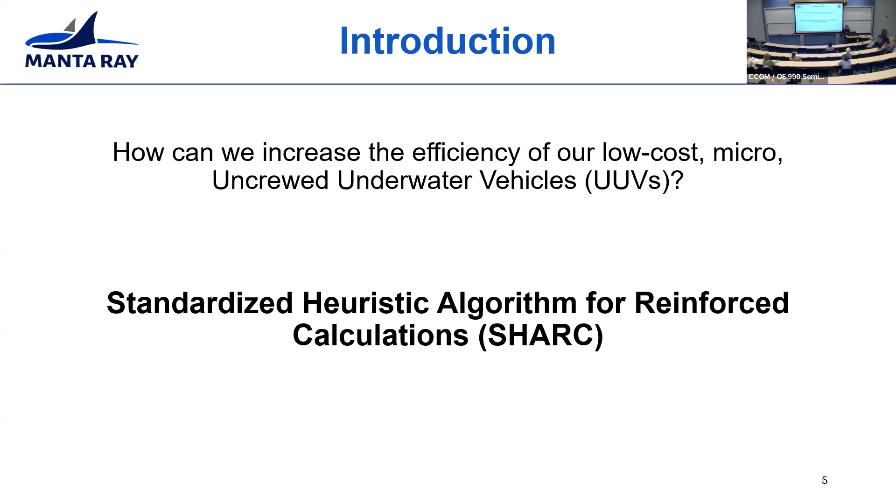But the trade-off for these lower cost vehicles is how well they actually work compared to their higher cost counterparts. We're not going to see the same performance in our lower cost vehicles that you do in the higher cost ones. But how do we accommodate for these trade-offs? Well, we make an algorithm to take what we're working with, predict how it's going to perform, and then work around this information to optimize missions. And this is where we came up with the Standardized Heuristic Algorithm for Reinforced Calculations, or SHARC.

So SHARC is a three-phase algorithm where first you consider what sensors you have on board, what you're working with, then predict what the performance of these sensors looks like, weighted on the ambient information that's around the sensor package itself. And then you're going to leverage this information to optimize your vehicle perception performance.

In the case of this presentation, we're focusing on a mechanically scanning imaging sonar, and that's going to be our perception sensor. And for our ambient sensor, we're going to use a conductivity, temperature, depth, or CTD sensor. Then we're going to predict and model the performance of this perception package to improve our vehicle mission performance.

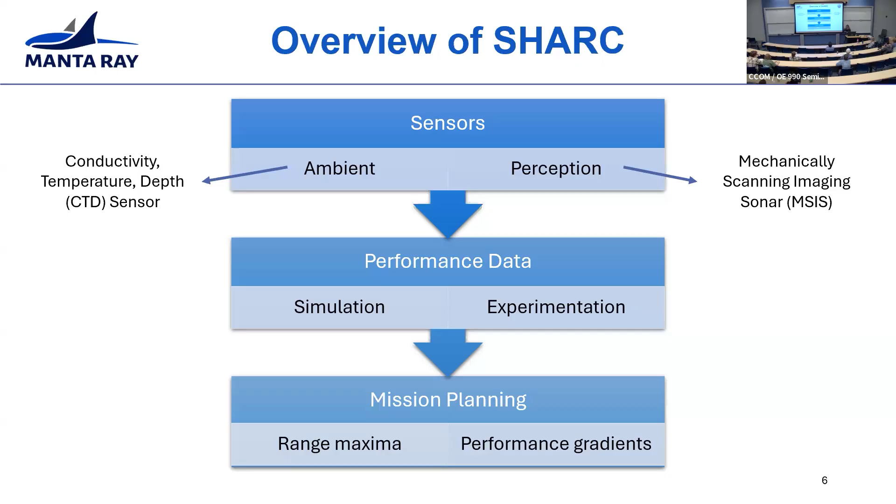And to use this equation, we need to identify 4 variables here: our source level, our transmission losses, our target strength, and our detected noise levels. Here we're going to start with our source level, which for this study, like I said before, we're looking at a mechanically scanning imaging sonar. The sonar we used was the Blue Robotics Ping 360, and the reason we chose it was because it's easily available on the market and it has a lot of similar counterparts that we could also test this algorithm with.

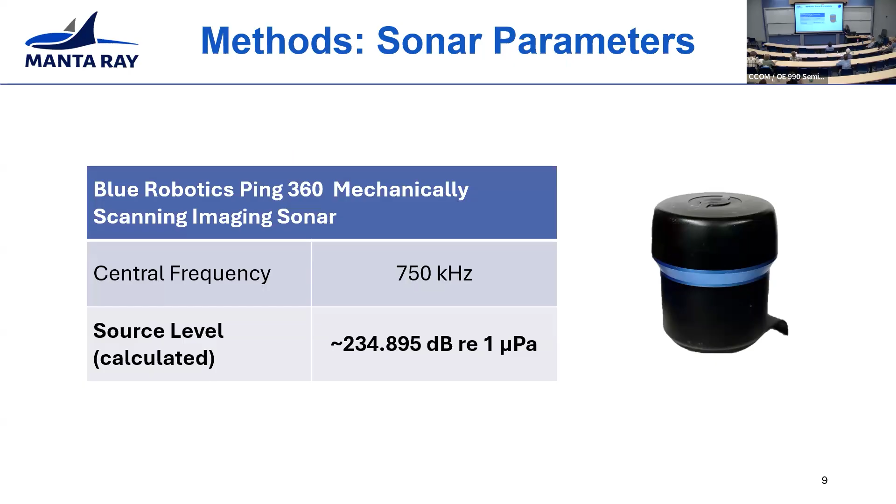The sonar itself has a central frequency of 750 kilohertz. We assume the far field approximation and that the transducer is a line array. So we found that our source level would be about 235 decibels, referenced to a pressure of 1 micropascal. The next thing we're going to look at is our target strength. So we're going to go a little bit out of order.

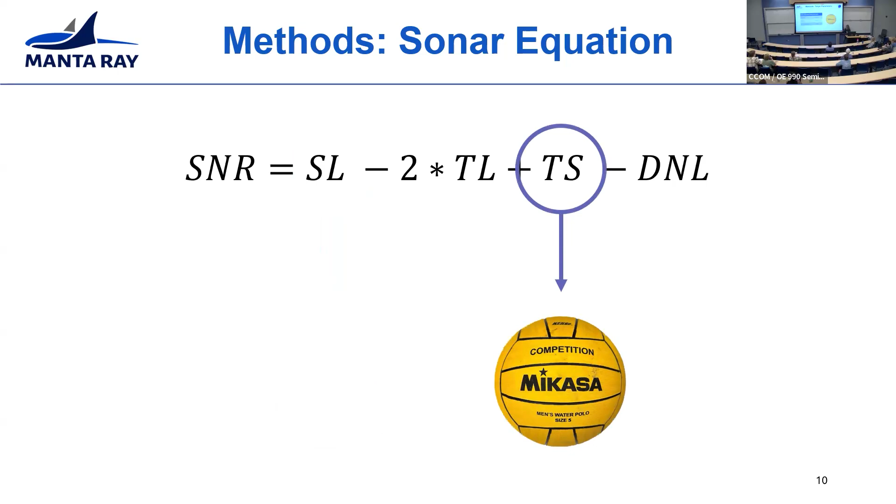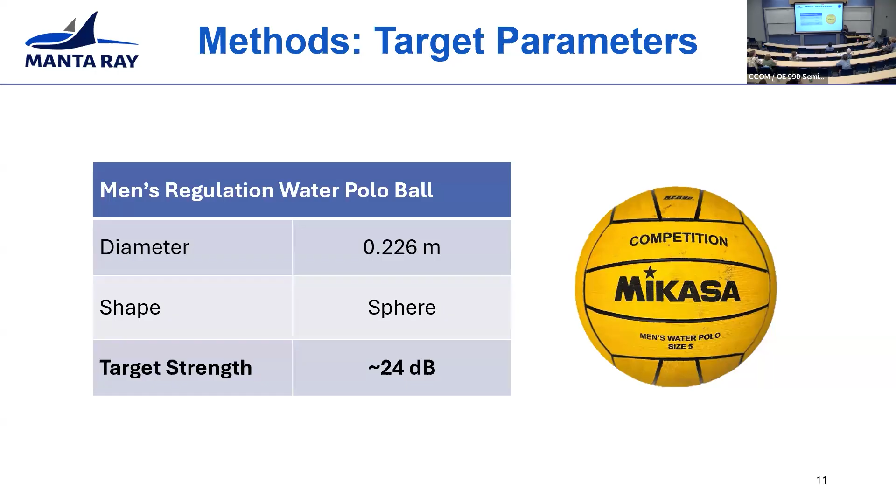And while you're in the marine environment, you consider a target such as vegetation, sunken structure, fish. In the case of this research, we're going to look at a men's regulation water polo ball. And yeah, a polo ball you don't really find in the wild too often, but I chose this target because it's easily accessible and it also makes things a lot simpler to model since it's an air-filled sphere. So using Urick's target strength calculation for a perfect sphere, we find that the target strength is about 24 decibels.

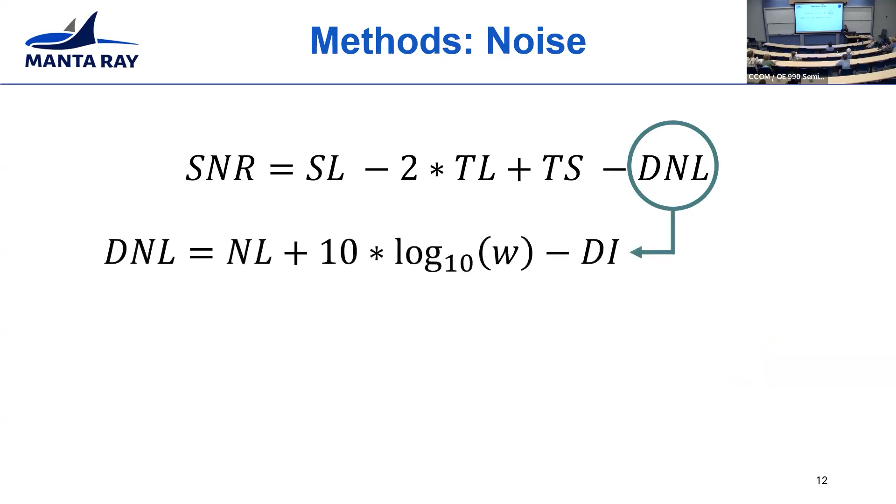So now we have our source level, we have our target strength. Let's look at the noise around both of those things, and we're going to use this equation to find our detected noise level. The first variable I'm going to focus on here is our noise level itself. Since we're using such a high frequency source, we're going to assume that it's self-thermal noise limited, and using Harland et al.'s equation here for noise level, and using frequency in kilohertz, we can determine that variable. And the other 2 variables here are also dependent on the source, where you're looking at your bandwidth and directivity. And that gets us our detected noise level.

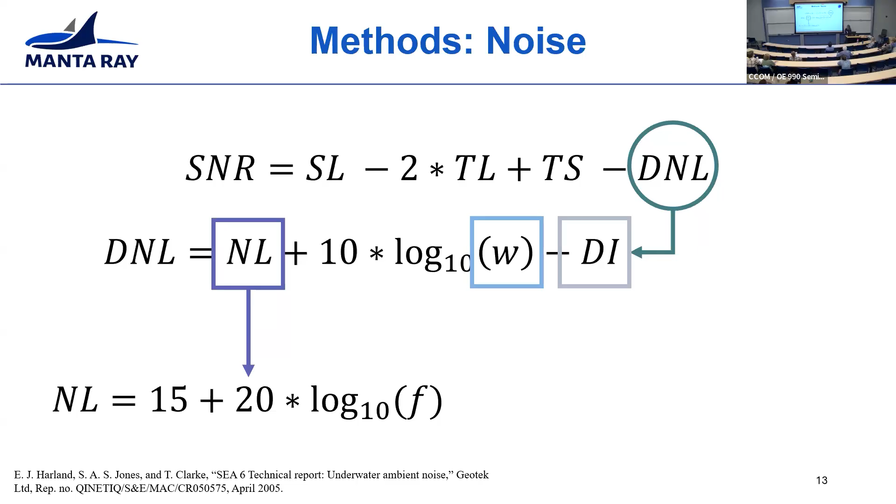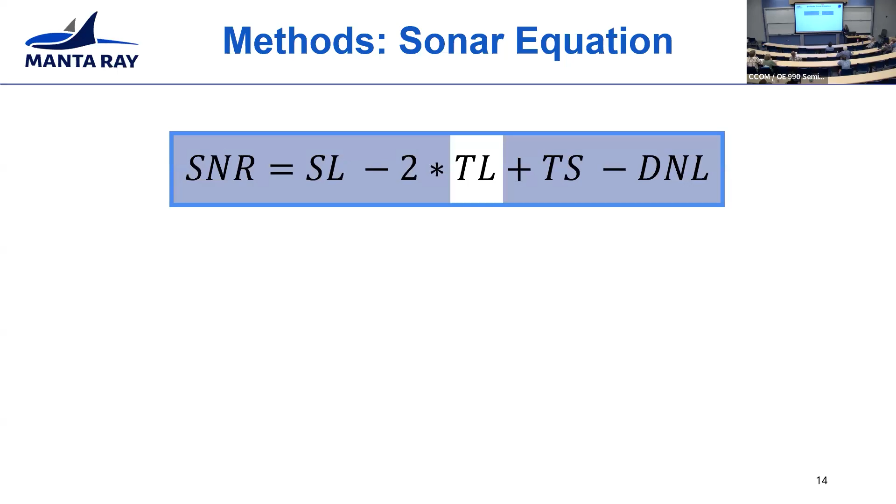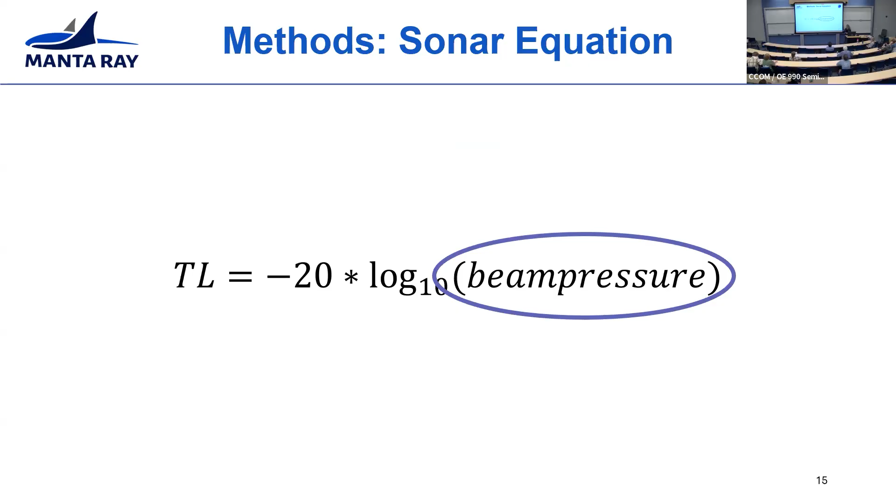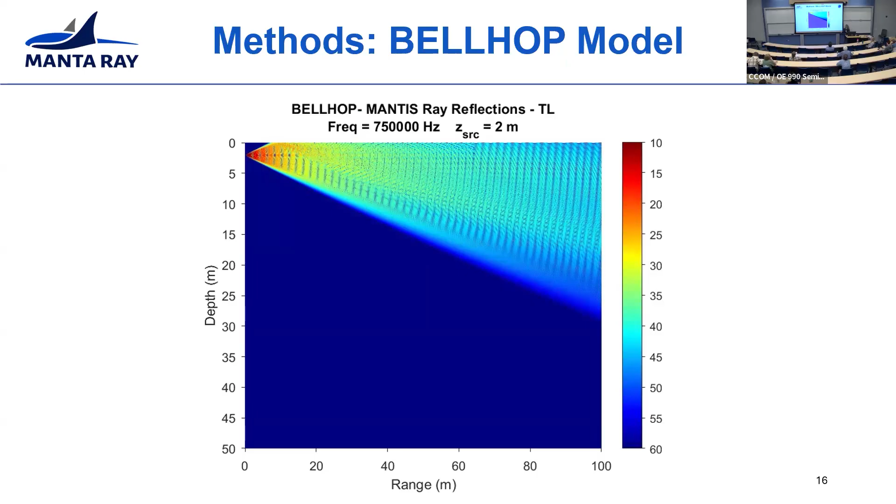To initialize all of this, we have an environmental file we can fill out where we can specify our sonar characteristics such as central frequency and beam height, our water column characteristics such as sound velocity profile, bottom acoustic characteristics, and channel range or length and depth. And we can also specify where we want to place our source or sources, and number of calculation points as denoted by RD or NRD across length and depth.

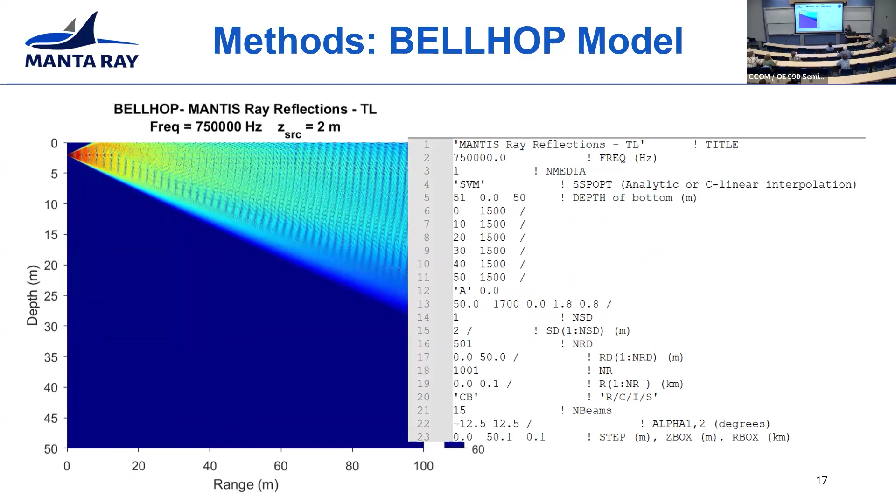Because we can also specify our sound velocity profile, or SVP, this is where our CTD data comes in. And we pulled from several historic CTD data sets from all across the North American region. One right from the Gulf of Maine, another from the Hood Canal out in Washington, and a third extrapolated from the Beaufort Sea. We also have a control group of 1,500 meters per second throughout the depth of the profile.

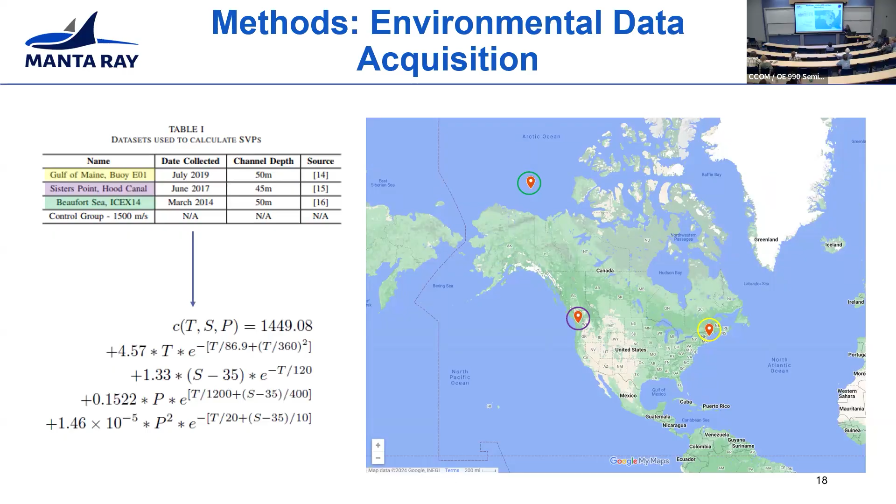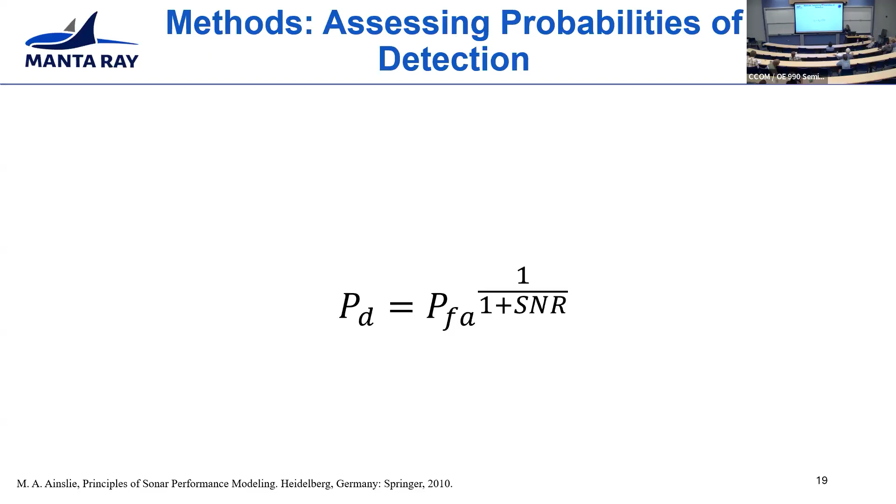And then we plug this data into an approximation of the Del Grosso sound speed equation to solve for that sound speed value. So going back to our sonar equation, why do we need this again? Well, it's to get this value here, which is our probability of detection. The last variable to identify is our false alarm rate, which we're going to assume to be 10 to the negative fourth based on Ainslie's sonar performance modeling text, and we can solve for that probability of detection.

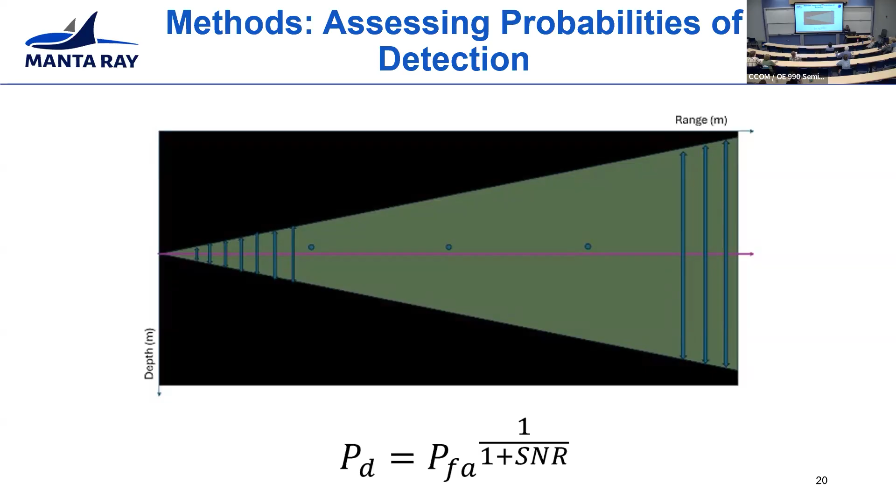But since we're going to have such a wide range of values based on how many solving points we put in our simulation, we came up with an averaging scheme where for every source depth specified within our simulation, PD across our beams are averaged by evenly distributed steps away from our source, filtering out values outside the beam. And then averaging was done across groups of beams for each source sample. We were then able to use these averages to gauge the general range performance for different PDs away from the source. This takes us right into our results here.

And we could not figure out a solution to actually filter that out, or to completely eliminate those boundaries. So for the shallower water column runs, such as less than 10 meters, we weren't able to really reduce these effects. So we focused on these deeper 45 to 50 meter channels, and focused away from those boundaries to make sure those weren't interfering with our results.

Now with that information, we took that snapshot of the column 5 meters from each boundary and focused on the range band where we see a probability of detection of 80%, or PD equals 0.8. These results were extrapolated using the averaging technique I specified in the previous slide, and each range represents range away from the source, and each depth is the depth a source was placed throughout the simulation. PD 0.8 was chosen because it was desired for sensor performance, as well as the last performance band prior to seeing those effects I described previously.

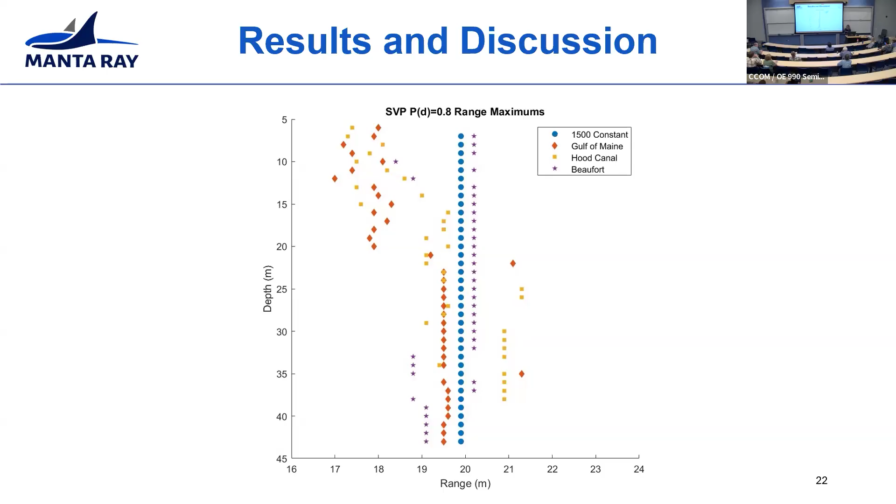And what we notice here is that for every sound speed profile, we're starting to see variances forming within the different depths. And to further break this down, we plotted each 0.8 average depth band along with the line fits of the different parts of the SVPs, which I'll go over in the next few slides, starting with the Beaufort Sea. The SVP here was a little more linear. There was only about 1 meter per second change throughout the 40 meters shown here.

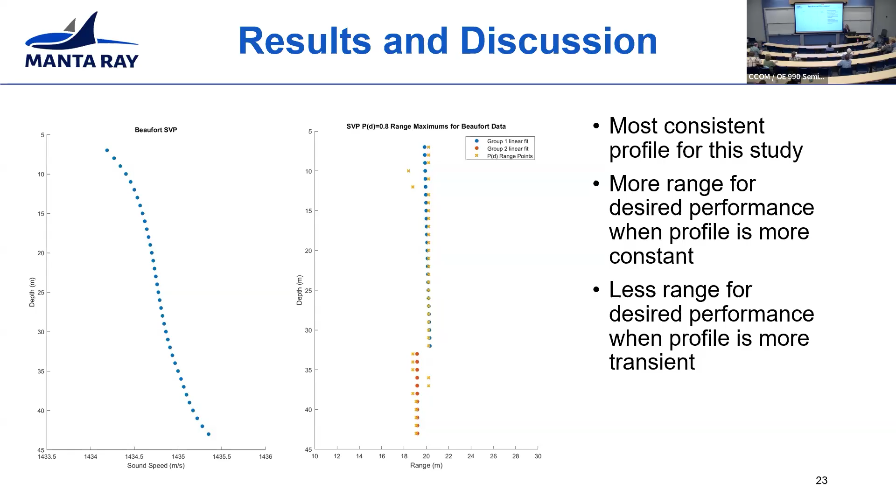And the change of the linear fit was for the different directionalities, but we start to see that as less change occurs in the SVP, the further out we can achieve that performance that we want to see. So you have more room to actually see that performance. Whereas when there's more change, you get less space, which we can see in our more variant SVPs, such as the Gulf of Maine, where you have more change at the top of the SVP due to change in temperature from this profile. And you can see that at the top there, where there's more change, you have less range to get that desired probability of detection.

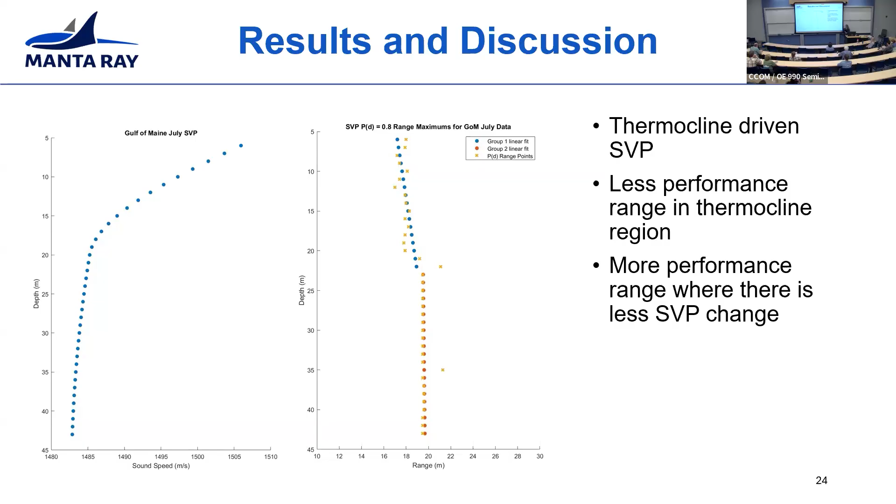But as you travel deeper into the water and the SVP becomes straighter, you get more of a pushed out range to actually get that desired probability of detection. And finally, we see that with our last SVP from the Hood Canal, where this one was changing due to a change in temperature and salinity, and we're still seeing those effects where towards the top of the profile where there's more change, you get less room to get your desired probability of detection. As you get deeper down, you get more range of your desired probability of detection.

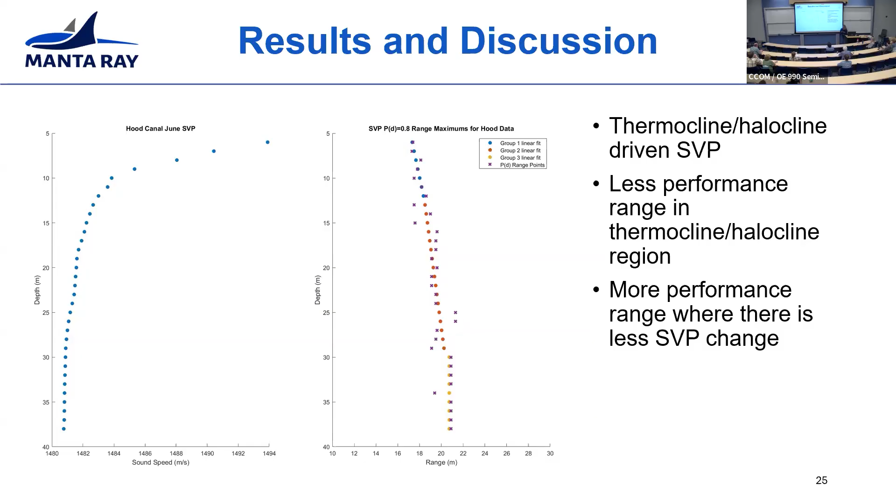And plotting these observations for the line fit slope of the SVP curve against the average maximum range, we can see there's a positive correlation between the two. So as you get more slope in the SVP, we get more range of our desired performance. Less slope, less range of that performance.

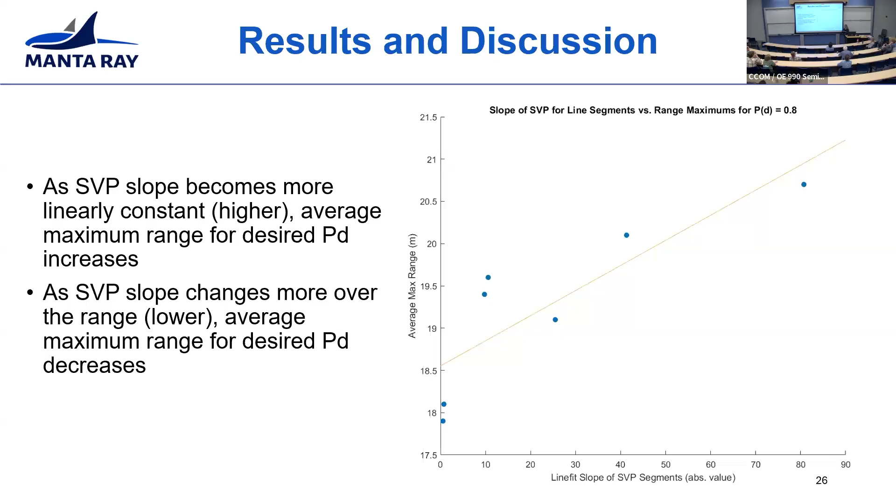So how can we use this with SHARC for mission planning? Now that we know about that correlation on the previous slide, if we have a pre-captured SVP prior to our UUV deployment, we can plan around our deployment depths and patterns based on how far out that desired range is. So say you're using a pattern where the UUV is traveling back and forth like someone mowing a lawn, you can increase or reduce those passes depending on how much you can predict your range will be for your desired probability of detection.

For our experimental testing, which you guys will get a sneak peek, we plan to implement this in different ocean environments, which is why we chose a target like the water polo ball and an easily accessible sonar like the Ping 360. And some of this testing already began in Washington State this past summer using the Ping 360 and the water polo ball, and all of that work is currently ongoing.

Finally, we'd like to apply SHARC to different sensor types such as stereo cameras. And while the study focuses on the acoustics portion, we believe SHARC could be applied to the different perception sensor systems on board these low-cost UUVs. These are my acknowledgements for the paper itself, as well as my references.

So then this is going to bring me right into my current research, which I alluded to. But before we get into that, I just wanted to introduce the manta ray group for those who don't know a lot about it. Dr. May-Win Thein is in charge of it, along with our co-PI, Dr. Yuri Rzhanov, who actually sits up in CCOM. And the manta ray group partners with the Advanced Controls Lab, one of Professor Thein's other labs on campus, focusing on quadcopters. And the main mission is to connect all of these different systems between undersea, surface, ground, and air to create a collaborative environment of all of these uncrewed vehicles.

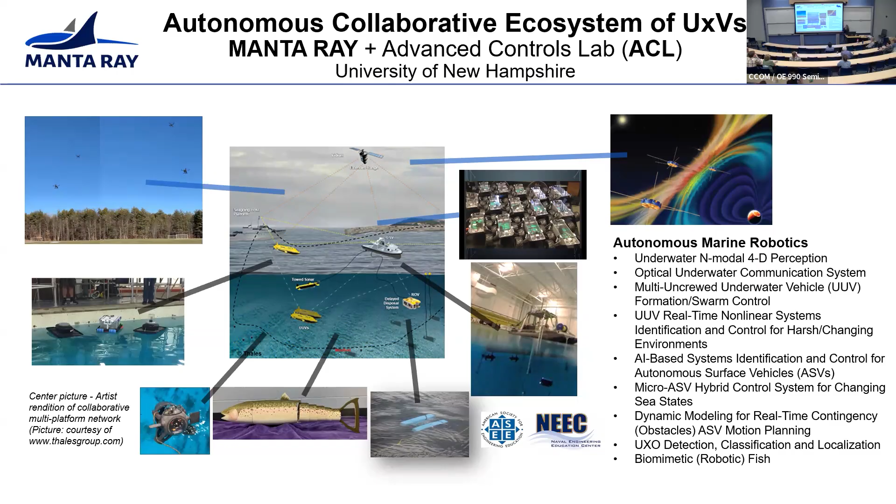And I think Professor Thein's in the room, but her pipe dream is for friendly Skynet, which I always laugh at. But that's the overall goal of the collaborative ecosystem that she's in charge of.

And then I just wanted to give you guys an idea of what our day-to-day looks like. As Adriana mentioned, I assist with the platform designs with the undergraduates, as well as I'm a mentor for them. So we go on trips out to Keyport, which was actually from the summer. We work on vehicles together. Our undergraduates always present at the URC at the end of the year. And our grad students, we try to go to the GRC or the SOE graduate symposium, and so on.

So the objective of my research is defining this bio-inspired set of techniques for autonomous perception using a multidimensional approach, and using these multiple sensors and multiple perspectives. And what I mean by multiple perspectives is we have multiple underwater vehicles capturing different viewpoints, or you have one underwater vehicle capturing a bunch of viewpoints and we piece it all together.

We're developing this for missions such as detecting underwater unexploded ordnances, or UXO, or even observing confined aquaculture pens. For those who saw Dave's presentation last week, we've done some collaboration with Aquaport, and Maggie's research kind of centers around that. And we're trying to make these techniques generalized to ensure modularity. So going back to that low-cost UUV question, how can we make this as low-cost and modular as possible to put on all of these different platform types?

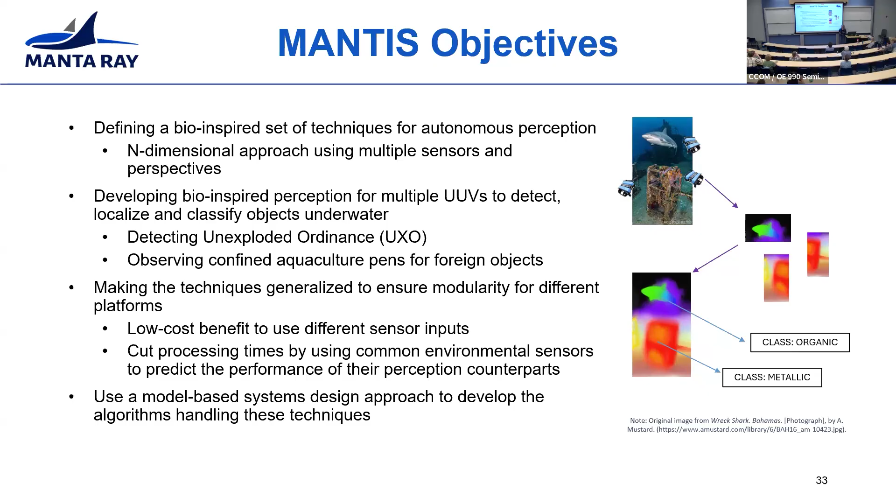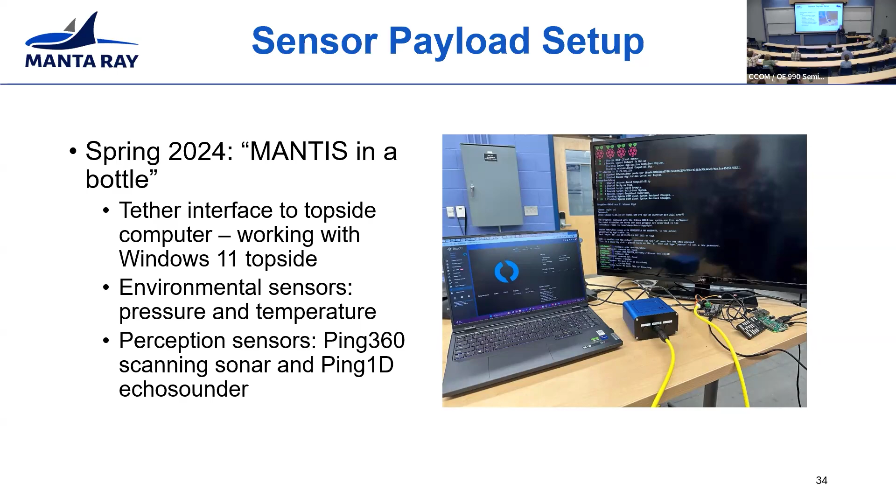Going back to the spring before I went out to Keyport, I got kind of a mantis in a bottle, or in this case, mantis out of a bottle, where I hooked up a Raspberry Pi to the Ping 360 sonar, along with a temperature and depth sensor. And I got things working with BlueOS, which has a Linux kernel that I was able to install onto the Raspberry Pi and access through the tether to my top side, which was a Windows 11 laptop. And you're able to SSH into the Pi, do diagnostics as your sensors are running.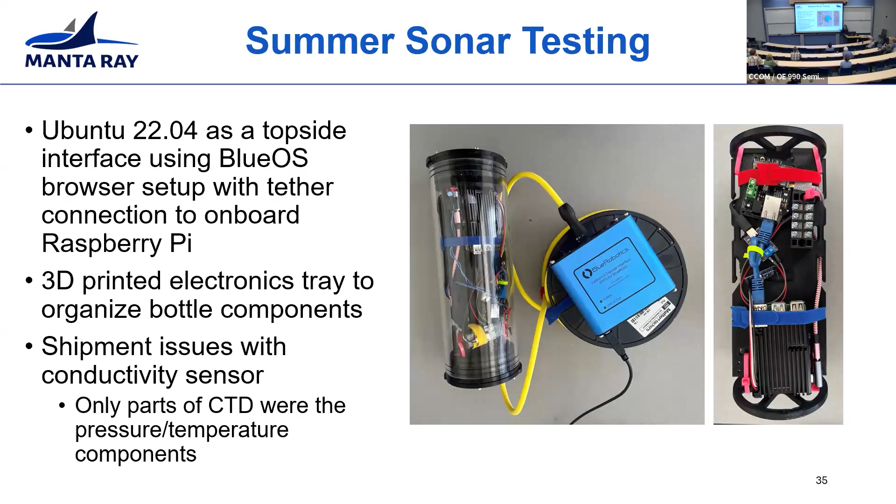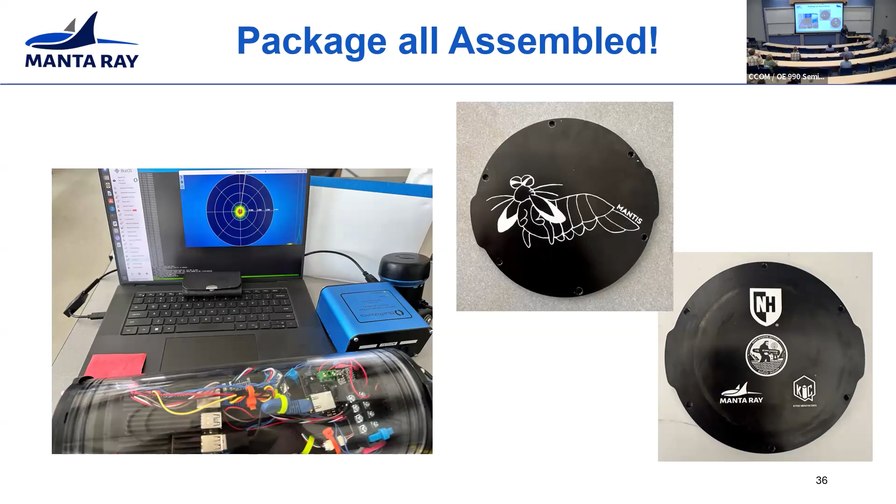And then this is just a snapshot of the actual package working on the Ubuntu machine, as well as Keyport helped me create my own logo for my research and laser etch it on the bottle end cap. So that was pretty fun.

Along with sonar testing, especially in an area that has a lot of marine animals and you have a military facility, so a lot of the waterways are controlled, there's a lot of environmental considerations. So I got to meet a lot of pinnipeds this summer, looking at different test sites, as well as filling out different environmental review board paperwork to make sure that my non-de minimis source was not going to hurt our pinniped friends.

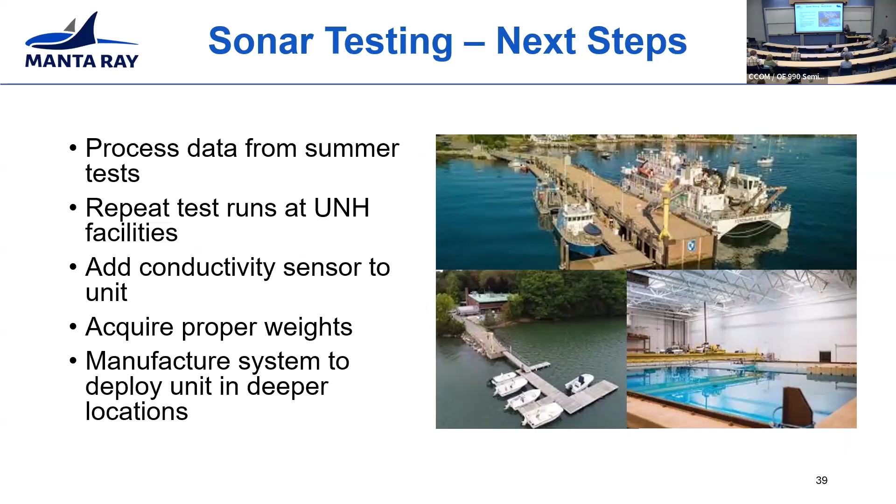Aside from the sonar, I also mentioned that following studies would be with stereo cameras, which we've also started looking into. We've acquired 2 ZED stereo cameras, and we're going to test those in the labs for different ambient light levels and see how the performance of those cameras change. And same thing, we're going to test that in the water, hopefully at the UNH facilities over the next year, and maybe even out in Washington again this summer.

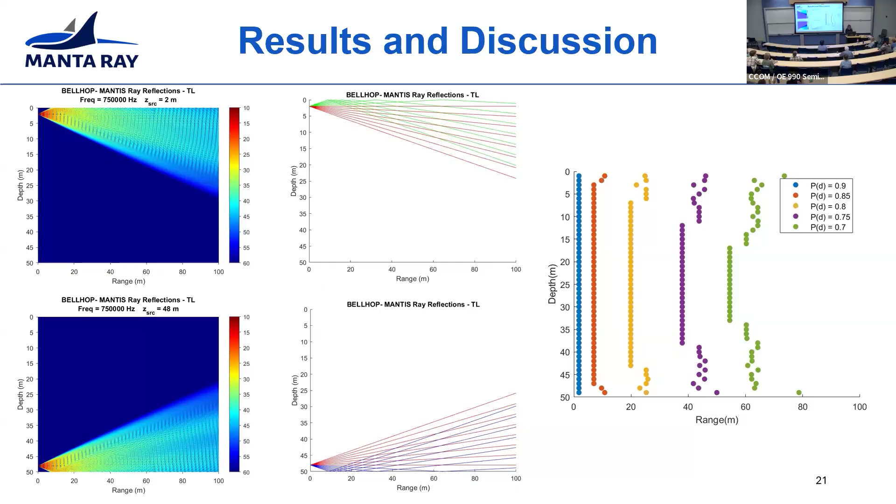Hi, I do work on robotic fish, and so my talk today is going to be about my paper for Halifax, but then I am going to go a little bit into the history of the robotic fish here at UNH, and some of my work on what I hope to do in the future through my research using the robotic fish. So my paper today is titled Mathematical Model of Subcarangiform Robotic Fish. I do this work in collaboration with Dr. May-Win Thein through the Marine and Naval Technological Advancements for Robotic Autonomy Group.

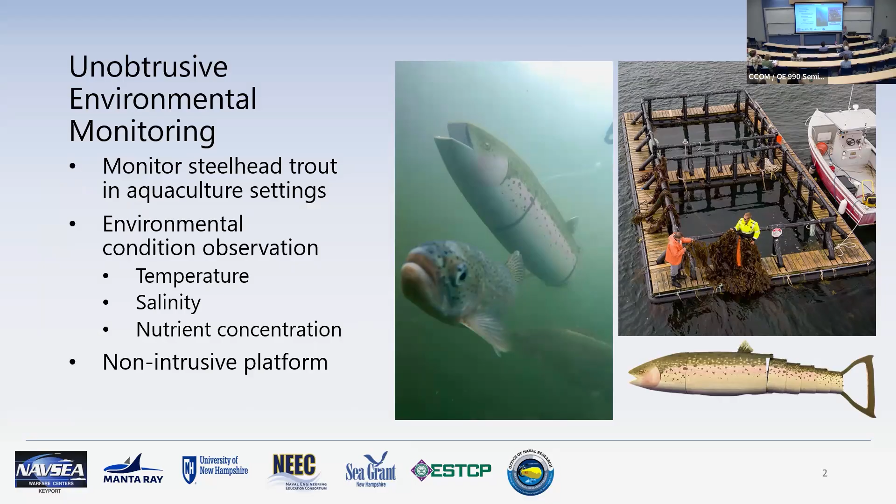The vehicle I specifically work on is the GHOST Uncrewed Performance Platform Submersible, or GUPS. GUPS is designed to be deployed in unobtrusive environmental monitoring conditions. At UNH here, we deploy it in the aquafort, or the aquaculture setting off of New Castle, New Hampshire, to observe wildlife and environmental conditions without disturbing the natural wild marine life.

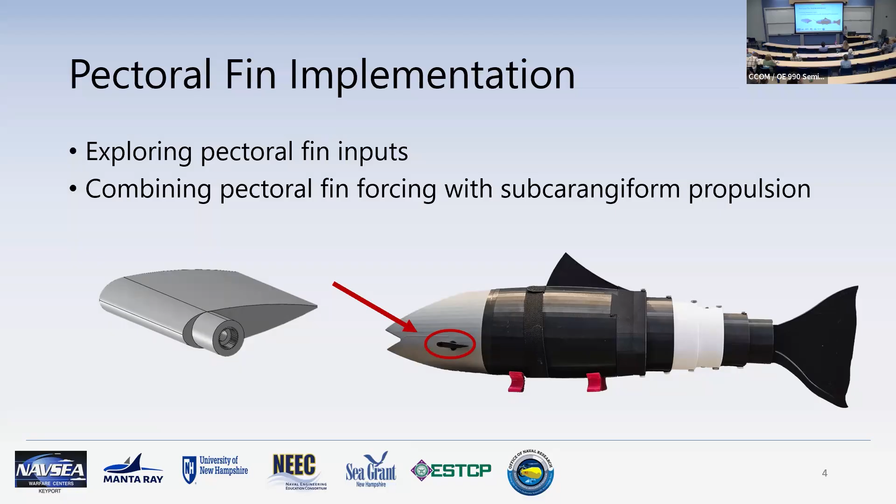At the beginning of this work, GUPS was able to swim in a lateral 2D plane using subcarangiform motion with a servo mounted at the back of the body and a driving location at the third tail linkage. This work splits the robotic fish into 4 linkages as shown here to help simplify the calculations. In addition to the subcarangiform propulsion, pectoral fins were implemented on the robotic fish. These pectoral fins were added to have an airfoil cross-section in order to have known drag and lift coefficients for simplification.

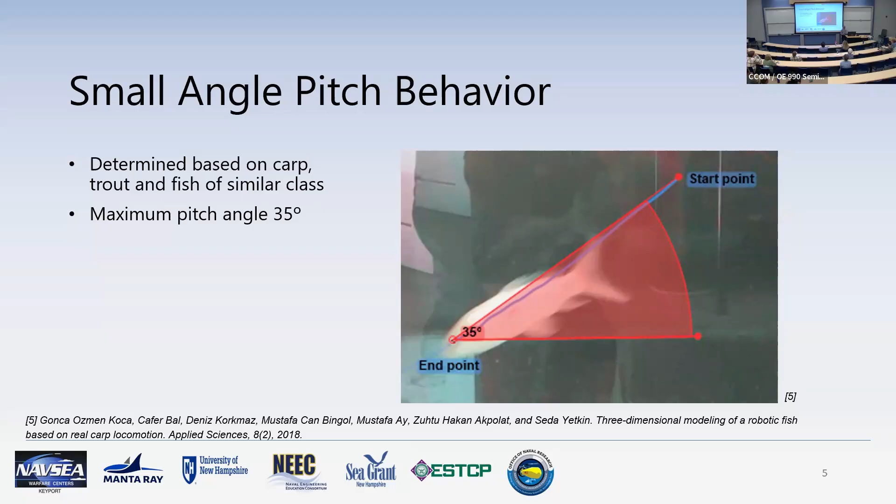Unlike reef fish, who swim in all different directions in coastal environments, trout, carp, and other fish of similar class that our specific robotic fish is based on maintain small pitch angle behavior. Koca et al. helped quantify this as a maximum pitch angle of 35 degrees. So that is what we will be using in this work as the criterion to try and stay below in our case studies.

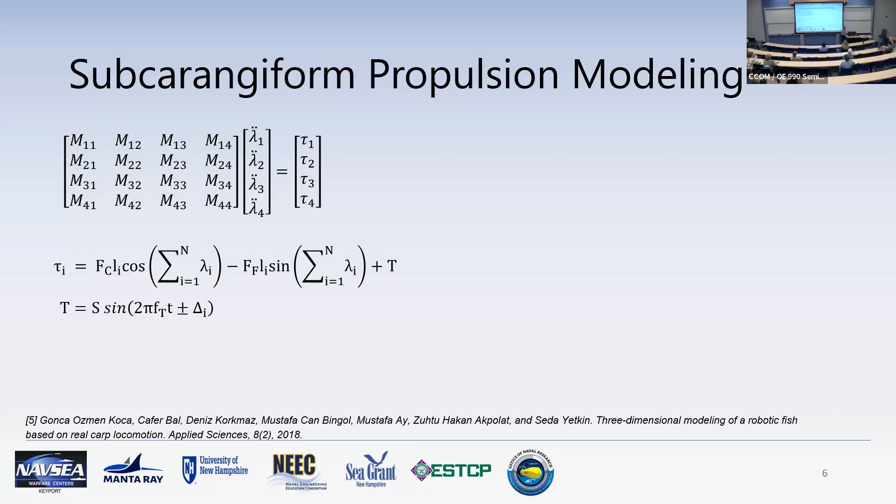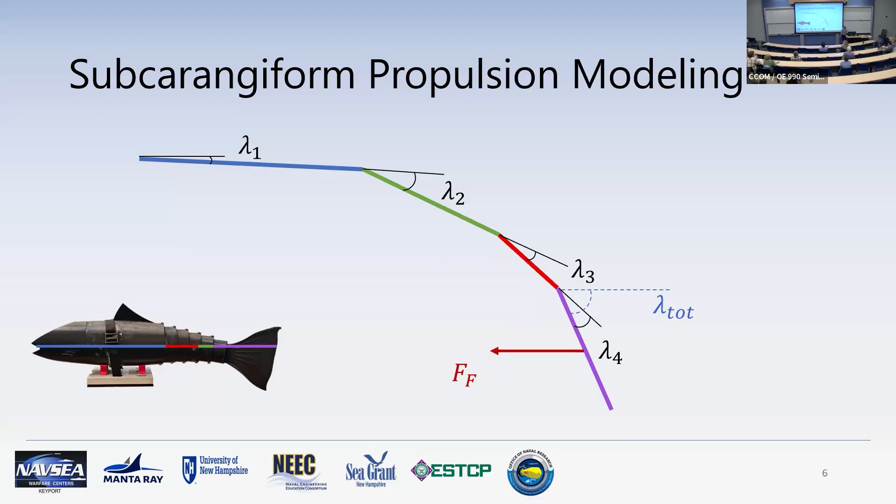So getting into the mathematical modeling of the subcarangiform propulsion, Koca et al. has this equation where we look at all of the different couplings between each tail linkage and the external forcing. External forcing is calculated as such, where T is our input from the servo motor, and it is kept constant through all of our different cases. Forces are calculated here, which gives us ultimately an angle between each tail linkage and an overall angle of the caudal fin, or the rear fin of the fish, in relation to the center line, as well as the overall thrust force that is produced.

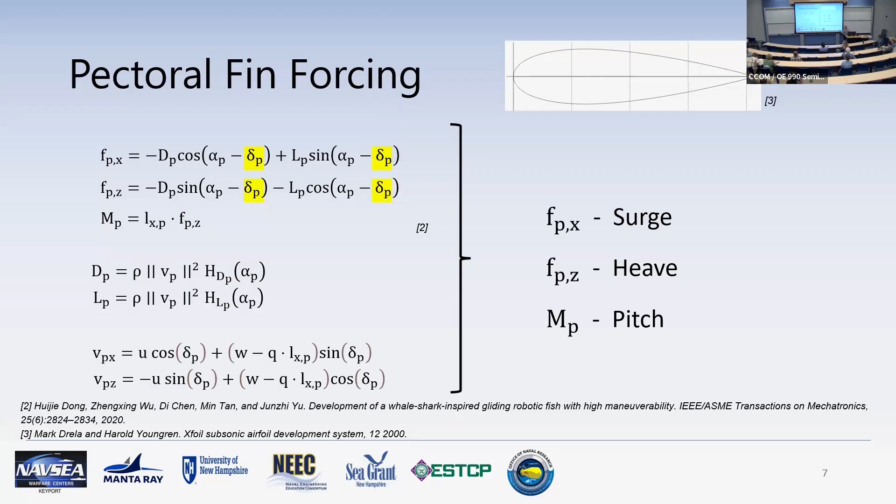Going into pectoral fins, Dong et al. gives us these equations in 3 degrees of freedom, where delta P is the servo input from the motors that are in the head of the robotic fish, which is what we will be varying in this study. The drag and lift forces are calculated here, where the drag and lift coefficients are known based on the airfoil dynamics, and the velocities are calculated as such, giving us our surge, heave, and pitch forcing in these three directions.

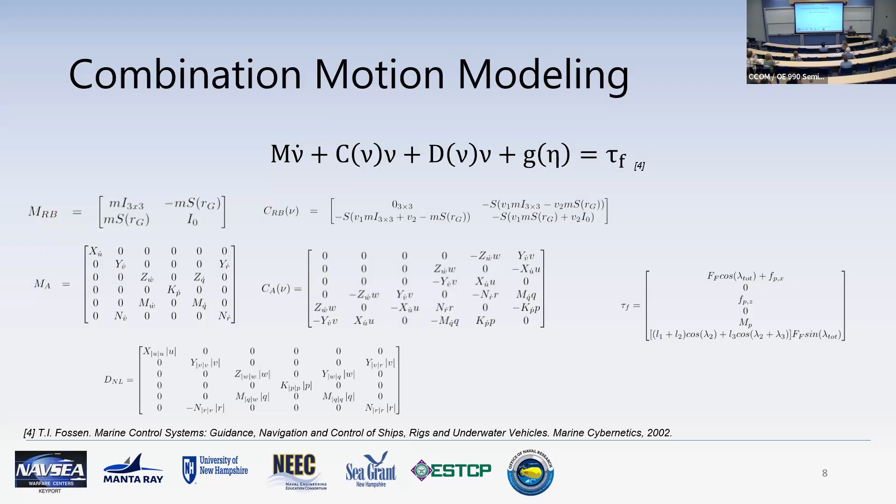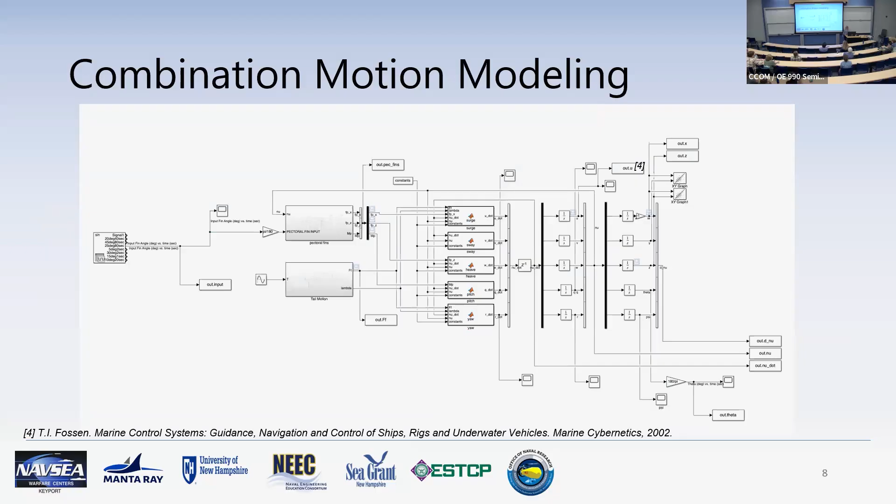From Fossen, we get to this equation where we have the moments of inertia, the Coriolis effects, drag forcing, which is estimated using SolidWorks flow simulations, and the previous slides give us this forcing vector tau. This culminates into a mathematical model, which is calculated using MATLAB Simulink, and this model in 5 degrees of freedom is used to produce all of the figures for this work.

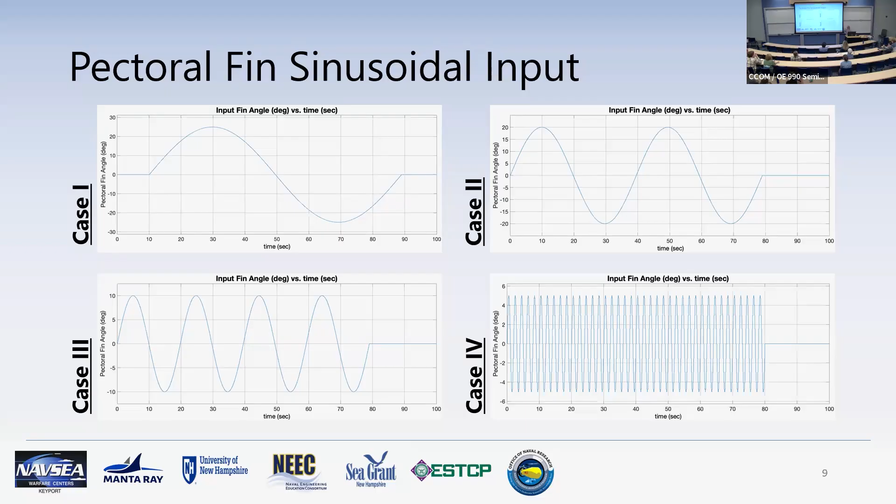It was decided to use sinusoidal pectoral fin inputs to investigate the pitch dynamics of the robotic fish. So the first 3 cases are a fairly low frequency oscillation, whereas the final case study gets into high frequency oscillations.

Case 1 was almost the extreme of the simulation before the system became unstable, where we are using a 25-degree amplitude and 80-second period oscillation for the pectoral fins. With the larger period of the waveform, the robotic fish had more propulsion with higher pectoral fin angles, which increased the overall pitch angle of the robotic fish.

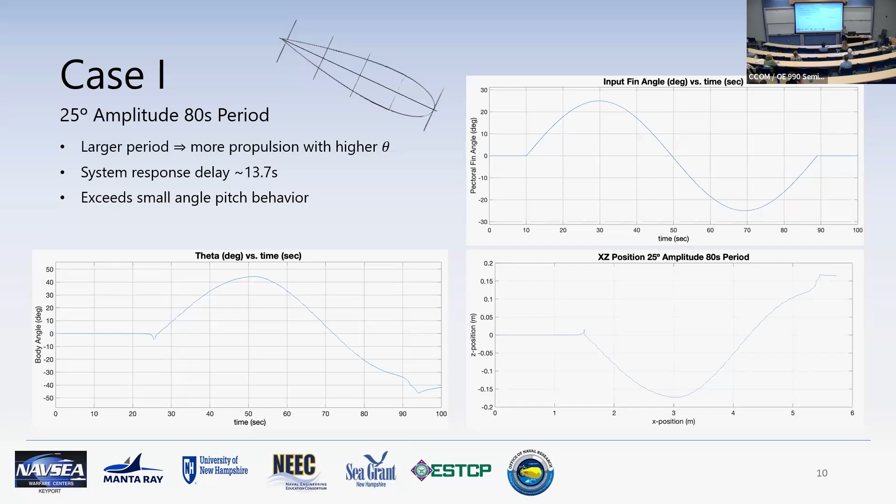This produced higher than 35-degree outputs, as seen in this bottom left figure here. It is also seen that there is a system delay between the pectoral fin input and the system response of approximately 13.7 seconds.

In order to narrow in on this 35-degree threshold, case 2 decreased the amplitude and period of the input, having a 20-degree amplitude and 40-second period. This did in fact decrease the pitch angle of the robotic fish, but it still has a pitch angle of over 40 degrees.

It is also noted that there is a vertical drift in the output forcing response for the robotic fish, and this is assumed to be based on errors in drag coefficients, especially in the vertical direction. And so we will be assuming that the first period of oscillation of the response was constant through all of the simulations.

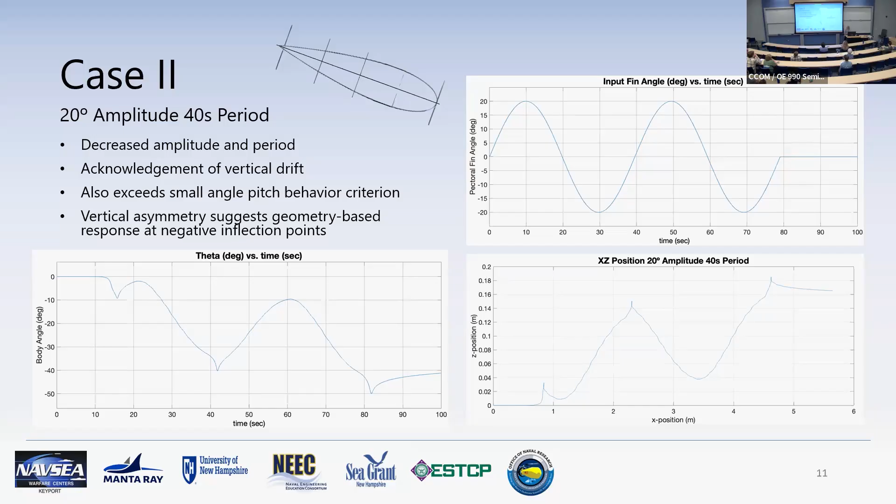Another interesting point we found with this study was there is a vertical asymmetry between the positive and negative inflection points of the input, which is concluded to be geometry based. This could lead to further exploration of these geometry based implications.

Case 3 further narrows in on our 35-degree threshold with a 10-degree amplitude and 20-second period. And this does in fact satisfy the 35-degree pitch criterion that we are looking for. And so this is determined to be our maximum operating condition for inputs for the pectoral fins.

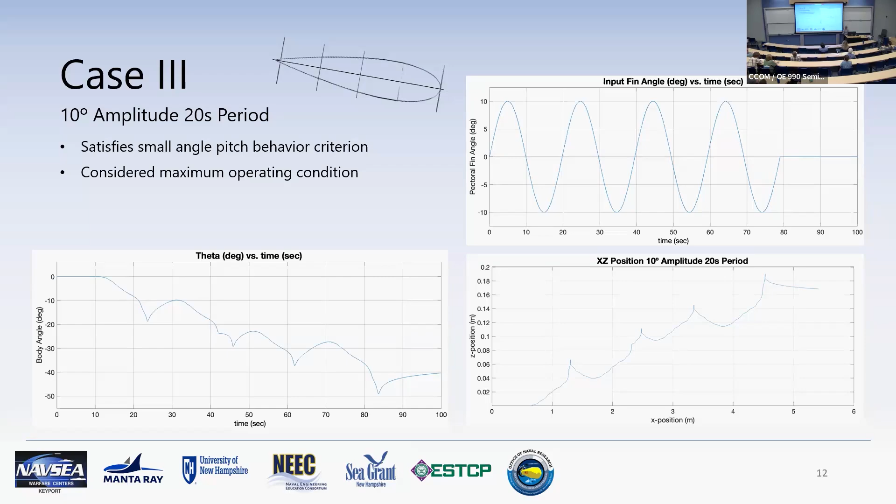Case 4 switches gears a little bit and looks at more high frequency inputs of pectoral fins with much smaller amplitudes. This case uses a 5-degree amplitude and 2-second period for the input, and understandably there is not as high of a frequency in the response oscillations.

With the larger system, the robotic fish does not have the ability to oscillate at the higher frequencies, and so the input frequency of the pectoral fins is found to be very closely related to the frequency of the caudal fin or the tail fin oscillation that is given. Further research is to be pursued about the relationship between these two oscillation frequencies and how that affects the dynamics of the robotic fish overall.

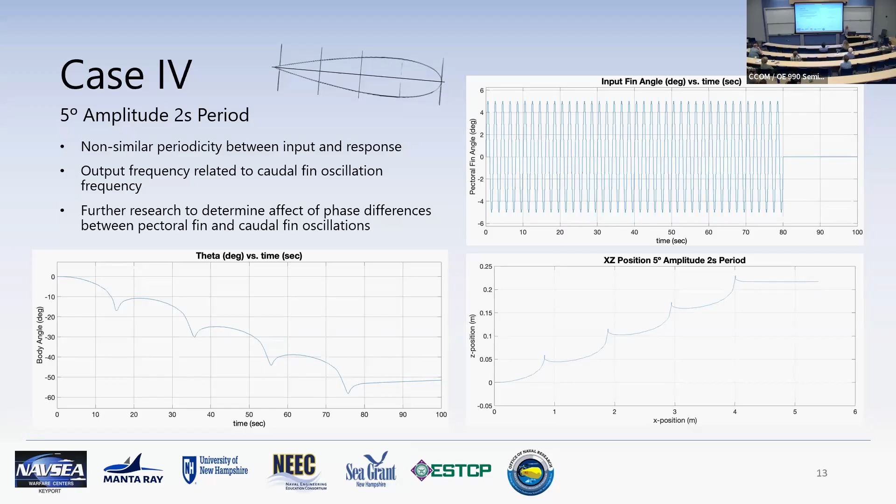In conclusion, we've found that there are larger pitch angles that occur when there are longer period waves of input, and the geometry-based sinusoidal asymmetry was found in our response. Additionally, the maximum operating condition was determined with a 10-degree amplitude and 20-second period for the robotic fish, and that will be used going forward to attain that biomimicry.

Finally, the output frequency of the response oscillations was found to be closely coupled between the tail oscillations and the pectoral fin oscillations, and that is going to lead to future developments down the line. Going forward, I would like to experimentally verify these results using the robotic fish.

This is our robotic fish in the engineering tank earlier this summer. And with the enhanced understanding of the pitch dynamics from this work, I hope to implement a pitch control algorithm to help control the UUV.

Additionally, we have added some fins, and I hope to look at the effect of these fins, so the dorsal, anal, and pelvic fins, and see how they affect the dynamics of the robotic fish overall.

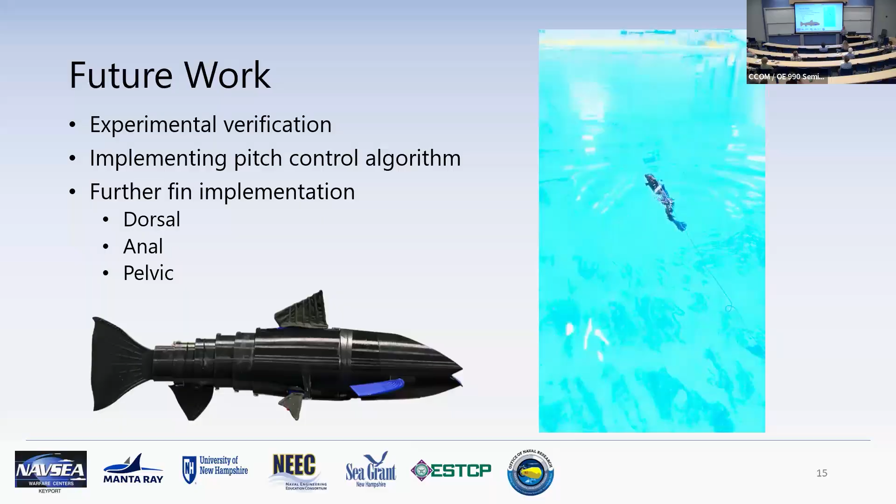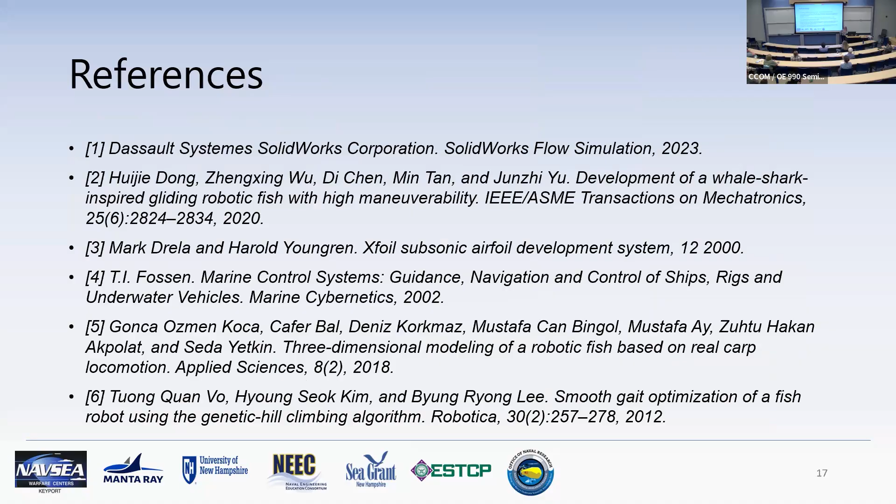I'm going to hold questions for a moment as I go through a bit of the history of the robotic fish as it started 4 years ago plus, and see how far it's come to today. So we have PVC GUPPS, which is where this kind of started. It was a COVID project of Hannah's, and it was made using PVC pipes from an online Instructables project.

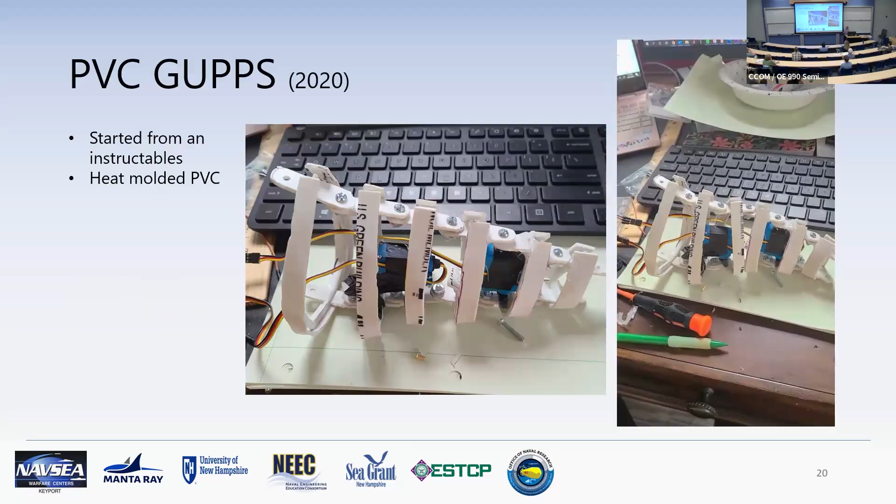This has 2 servos in the tail, but it only had a tail. From 2020 to 2022, some senior project design teams helped develop this robotic fish to become what we call skeleton GUPPS.

So this was able to achieve the quintessential flap motion of the robotic fish in air, but as you can see here, the tail does not displace all that much water, and so did not produce sufficient propulsion underwater.

That comes to 2022, 2023. This is where I came into the project, and through the senior capstone team that year, the surface area of the tail was increased, which was able to produce sufficient propulsion for the URC. So we painted it all up to look like a steelhead trout at the URC. And one thing to note is we won the URC competition in the ocean engineering section that year.

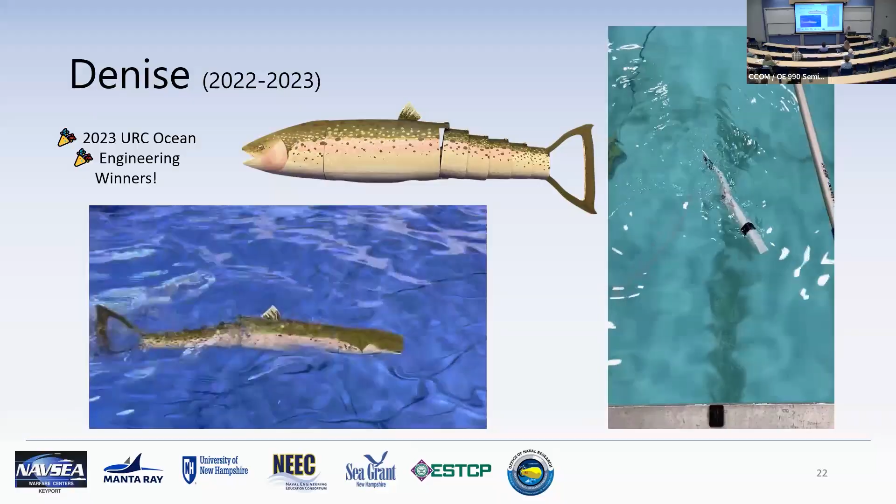But it was pretty cool. Some of you were there and saw our robotic fish in the water, but that's something I'm very proud of. This past year, the 2023-2024 academic year, the pectoral fins were added, as well as some of the other fins. Of note, the 2022 to 2023 group was much larger than the group this following year. And so the addition of the pectoral fins was a smaller step. However, there were understandably fewer people.

I don't know, I thought I set this to loop, but

They put a couple of different varieties of robotic fish painted up in different colorings. So this is the steelhead trout coloring, and so it's trying to blend in. They had one that was a spiny dogfish, so a natural predator, and then the third was just a plain black, no coloring. And determining whether or not the fish reacted differently to the different colorings, or if they reacted at all.

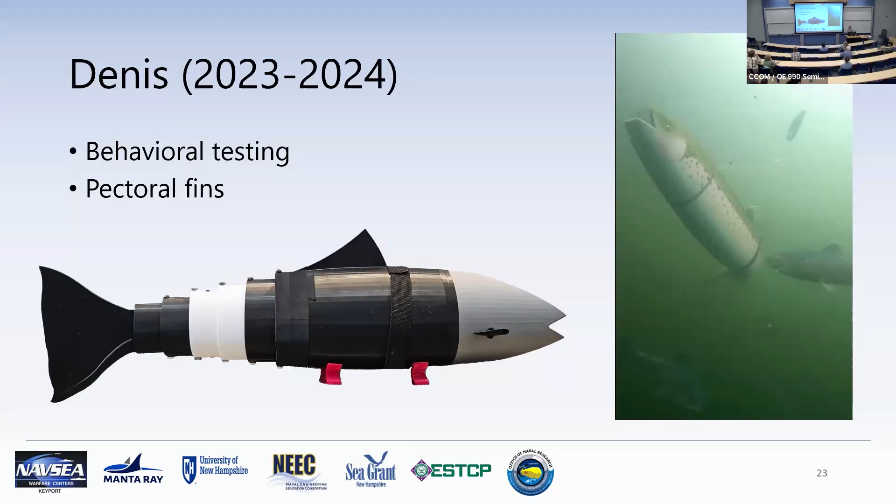But coming to the present day and where we were at the end of the summer, we have added some of the fins that have been discussed already. And in the transition from the URC-winning Denise to Denis, they switched from an Arduino to a Raspberry Pi, which had many struggles of its own, but allowed the simultaneous operation of the caudal fin tail and the pectoral fins, and also allowed us to add a tether.

Through the past academic year, the fish had not been able to swim, and so Denis finally splashed down in August, and we are very proud of him. But with the addition of the dorsal fins and pelvic fins, which have spines in them to be able to be actuated in the future, it makes it very top heavy. And so Denis has a life jacket, which is kind of ironic that our robotic fish has a life jacket. So one of the first things the new senior project team is going to embark on is figuring out the ballasting of the robotic fish.